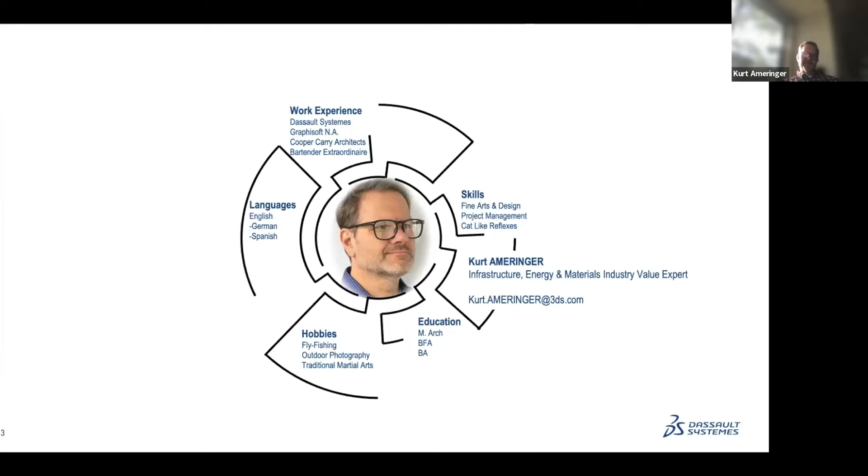So I guess going way back, when I was 8 years old, my grandfather, a general contractor, took me out onto a job site, gave me a broom, handed me a dustpan, and you could say introduced me to the concept of eliminating waste in construction.

So, quite a number of years later, in I think it was 2000, after a number of years working in the architectural space, creating 3D models of buildings to be able to produce drawings and schedules and other pieces of that, I started my journey to really change the way that we think of, as an industry, design and construction, and really wanted to push this idea of moving from working in 2D and to help people start to understand the value of what was eventually branded as BIM. And so that was where I kind of wet my feet on the technology side. Geez, 22 years ago now.

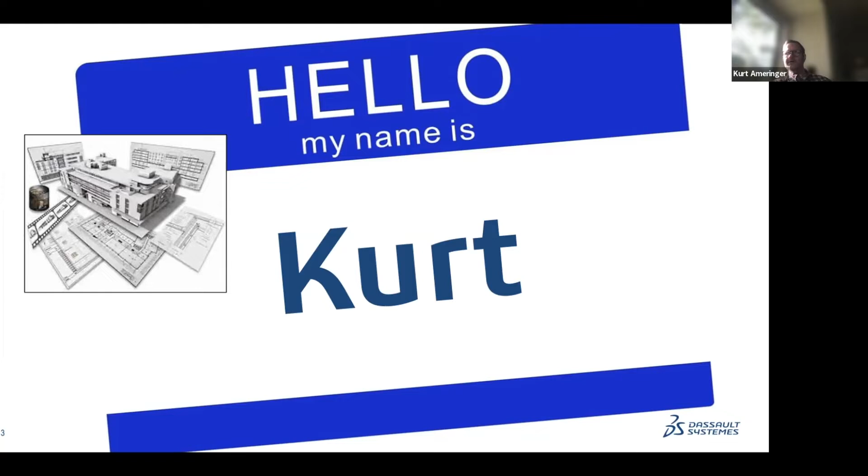And about 3 or 4 years into that journey, I started then looking at how BIM could be leveraged into construction, and started working with some of the general contractors in the Bay Area to develop workflows and solutions that populated eventually what was branded as VDC.

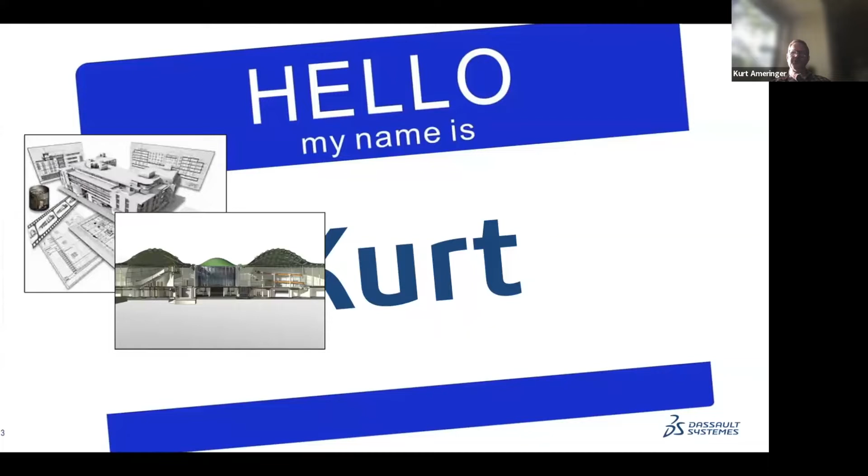So after 10 years within that space, I made a lateral. I started looking around at other kinds of activities that were happening in the world. And I moved from focusing on best practices in construction and really wanted to start learning about best practices for manufacturing and experience this idea of PLM, product lifecycle management, and where that could help inform a lot of our decisions.

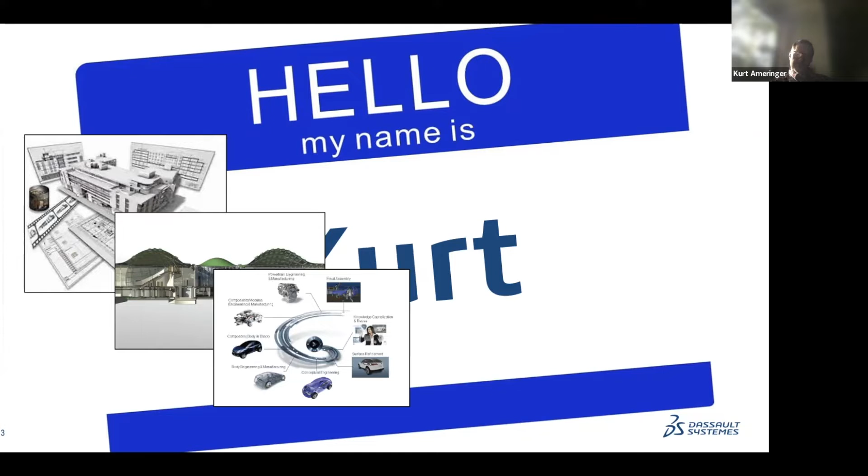By this point, BIM and VDC had a pretty good hold in the space. They were doing what they do, and I was looking to take that a step further. And so that was 10 years ago where I started that leap. And that actually led to where I am today with Dassault Systèmes, which is leveraging this now 20 years of experience as a technologist to investigate how we can improve, again, how we collaborate, how we work, and really in the recent years, looking at this concept of experience.

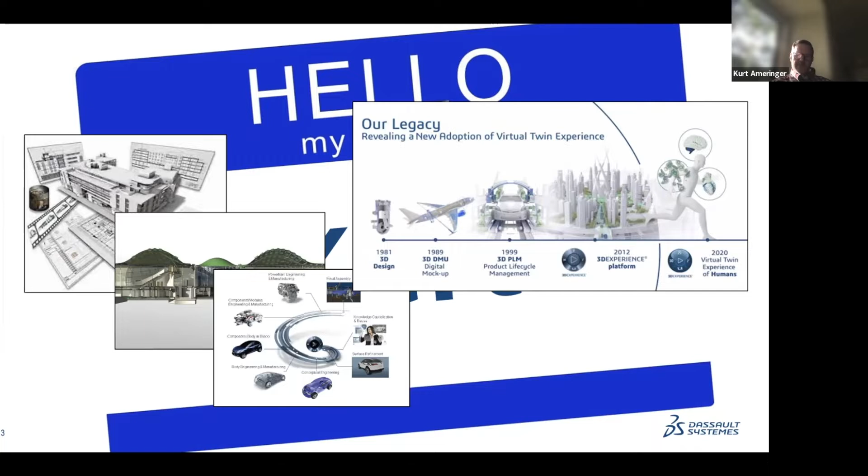So all that being said, I guess to get started, I want to take a look at this with the end in mind. So start at the beginning, look forward to where we want to go. And this is the virtual city of Rennes. Rennes is one of a number of cities that's been virtually built with a digital model of the entire city. If you're not familiar, Rennes is the capital of the Brittany region, and it's the second fastest growing metropolitan area in France. Estimated population somewhere just under 500,000.

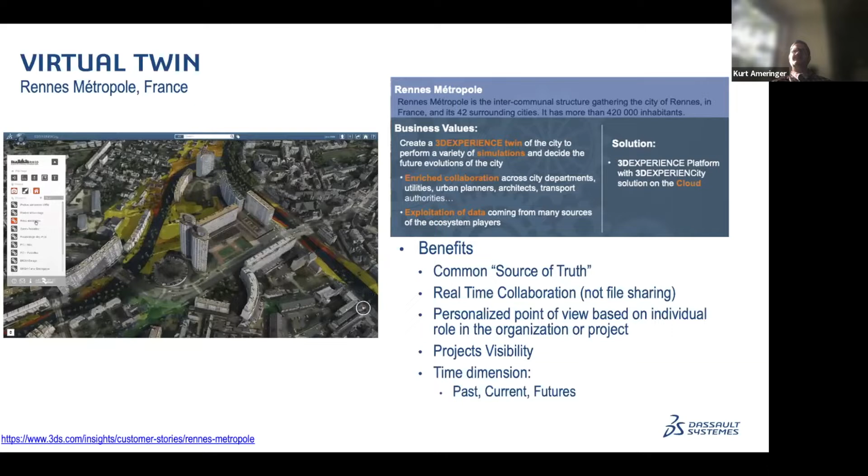And this data set that we're looking at, Virtual Rennes, has been created by combining different data sources in a single unified referential. It's constantly updated as new information comes available, so it's really becoming its own living and breathing entity that combines the buildings, the site, the GIS data, really everything out there that's available. So it becomes an accurate and reliable virtual equivalent of the real city.

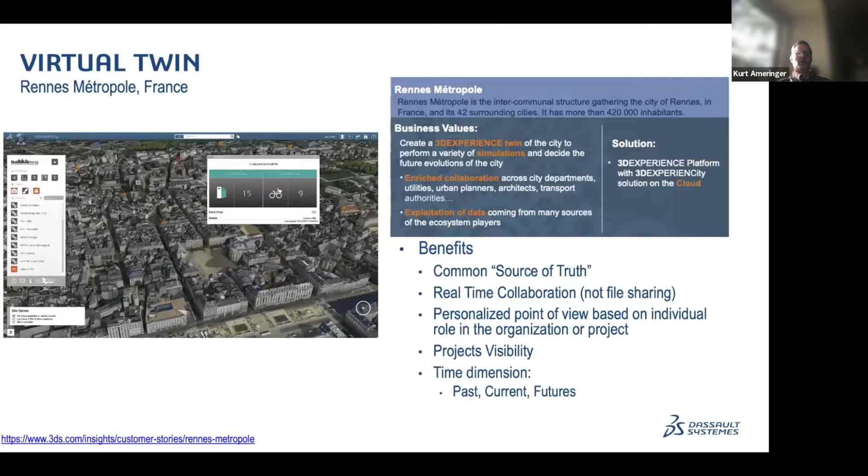And it's something that officials within the city, the residents, businesses, developers, utilities and service providers, anybody within that space can look at, can simulate, can virtually experience and visualize this city with a holistic view of how it may evolve. Even in some cases, collaborating on sustainable solutions for the urban environment here, where we're looking at, for example, how somebody might move through the city on a bike and looking at traffic patterns and impact, all of that's been laid on top of this.

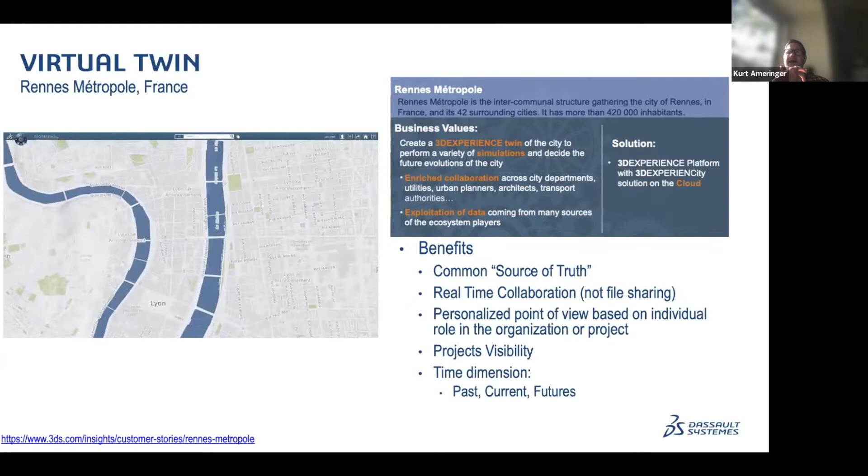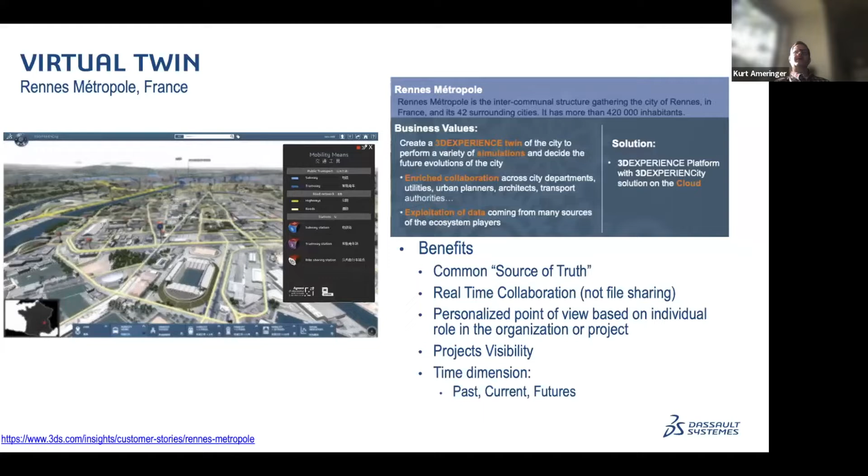And so we're also doing a similar thing over with Lyon. And again, I mentioned there are a number of cities around the globe where this is being engaged, but I want to be clear, this is not just a collection of massing models. It's not a bunch of files that have been referenced together as a pretty picture. This is really a fully detailed data set of the entire city, where literally every building, every system, in some cases, every tree has been populated in a single integrated virtual twin.

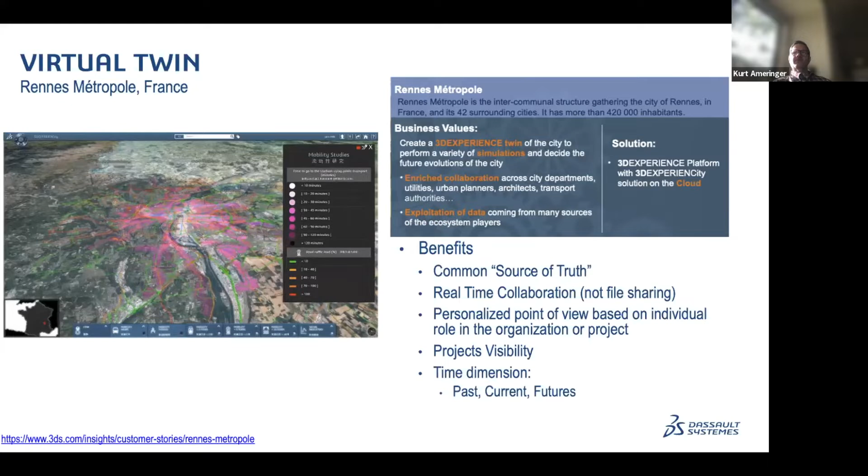So leveraging this information at scale for the development of the entire urban environment that's constantly evolving has become much more manageable than it would be otherwise. And so this makes coordinating the renewal and planning of buildings, utility networks, mobile systems, whatever infrastructure is there, less of a challenge. And it enables people to look at long-term planning and decision-making to be able to accommodate the needs of the residents both today and downstream into the future.

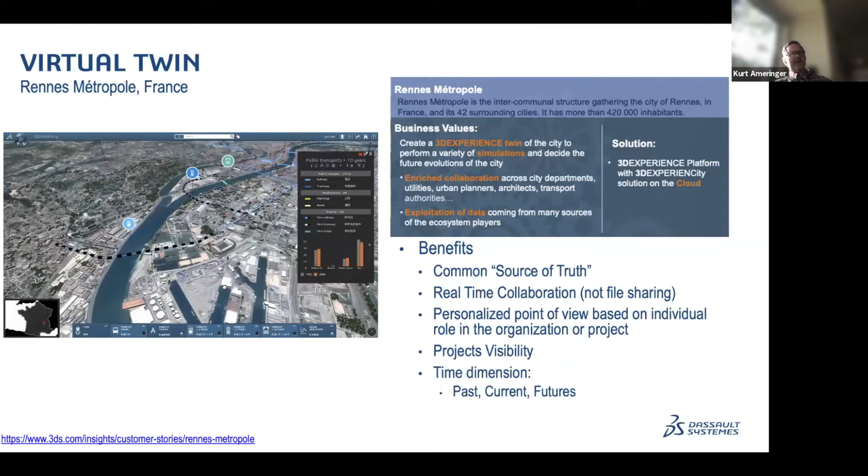So with this virtual twin defined at this level of information at this scale, key stakeholders are really able to engage in a collaborative effort to digitally drive a sustainable transformation of the city, with potential to be able to anticipate and really plan for a more livable, resilient urban area by leveraging and interpreting all of this data.

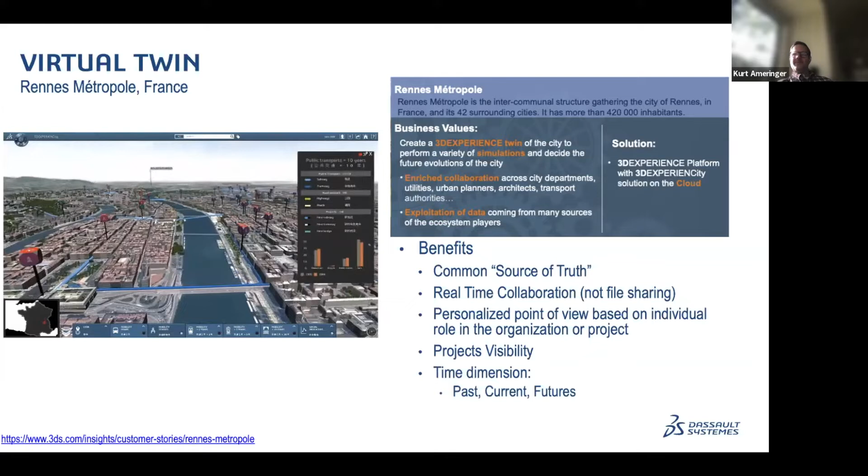So I think about where we stand with building information modeling today, and I see a world of potential in expanding that information from that single entity to that entire city, and being able to virtually build with this level of detail, that fabrication level of information, and the opportunity to leverage that data for moving beyond BIM really becomes exponential.

So I said twin. There are a lot of discussions about twin, virtual twins, digital twins. My grandfather was a twin, but what is it? And when I like to start off, I think about, again, this idea of capturing information. And a lot of us are doing that today within the cloud, within server systems, whatever it is, we're storing files. And this twin can store files. But it's not like a common data environment where we're just uploading project files to a cloud or some repository. It's where we're actually integrating this information and starting to make it actionable.

So to frame this a little bit differently, when I think about what I see as most of the digital twins that are available today, I see these as being purpose-built. Somebody builds a twin and a BIM, it's intended to produce drawings, or maybe it's intended to do structural analysis, or maybe we're starting off by capturing existing conditions, or we're building something to do construction simulation.

But from my experience, I found that a lot of these twins don't really cross the border between those different sections. In other words, one that's built to do models may not be built appropriately to do simulation. And the one for simulation isn't built properly to do sequencing. And so, how do we integrate this information? How do we do more than serve that initial purpose that was specifically built with this information?

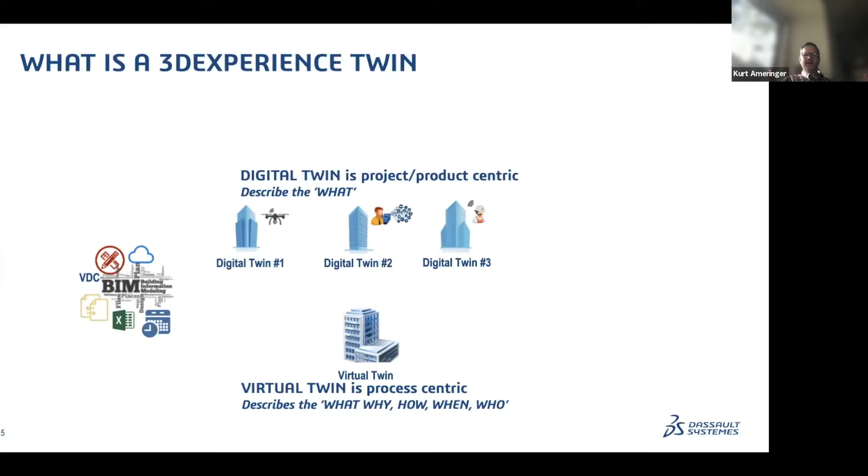This idea of a virtual twin starts to go beyond that. It captures and communicates this extended data in a standardized business semantic so that it can be used for more than that single purpose. So in other words, that virtual twin is capable of doing all of these different activities. And in fact, it can create these artifacts like BIM or drawings or whatever it is that we're looking at as a digital twin. But the virtual twin starts to live and breathe as this evolving reference that can grow as the city grows or as the project grows.

And then taking that one step forward, it starts to support a synchronization of business processes and our activities that provides this secure integrated point for all of the project information to come together to really be experienced, to allow this capitalization of business knowledge and process. And so as I look at it, this starts to become a business platform. It starts to connect all of the participants that are in our value chain.

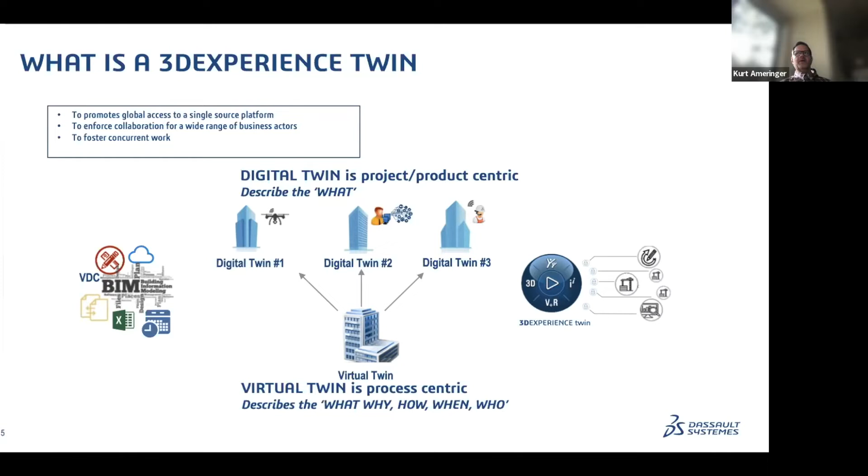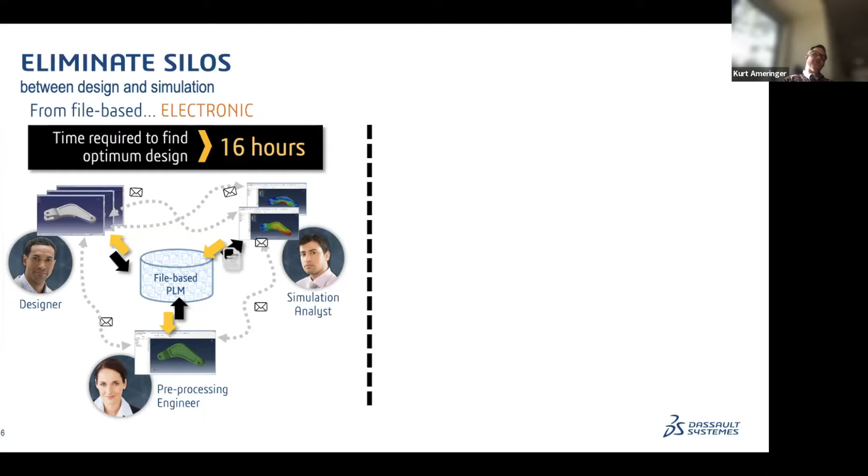And when we looked at this process and all of the data that was going back and forth, we started to realize that when the team was working in that unified environment on that single repository of information that was integrated, they were communicating together, they were designing in context together, they were making decisions together in that same model at the same time without stepping on each other's toes. The time to find solutions was dramatically decreased. In this example, going from, I think, 15, 16 hours down to 1 hour of running that simulation. And as we start to automate those things, we can even make that faster.

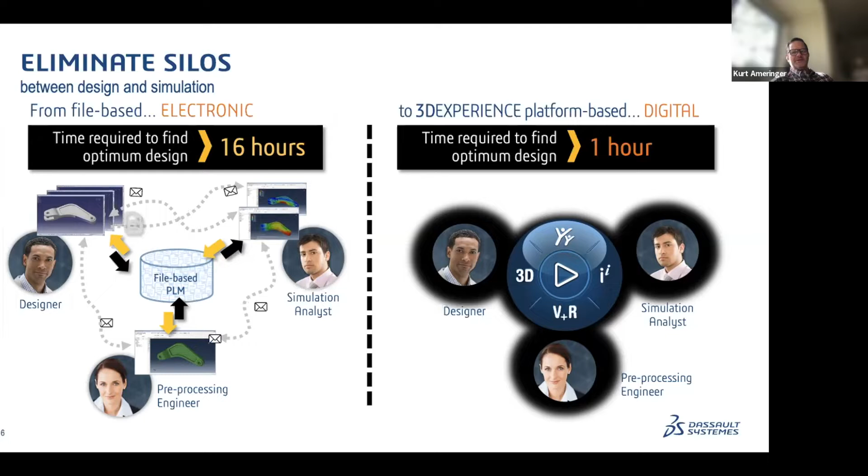But where this becomes, to me, interesting and exciting is not just in the time savings, it's again, that ability to communicate. So once we've run these simulations, all of that data is made available in a single unified environment where somebody even as senior as myself can get in and easily review all the options, all the decisions, who made the choices, what was the process that we went through to get to this point, and then make a much more well-informed decision about next steps, about how to move forward. In this example, we're looking at the environmental impact, the delivery schedule, the cost of what we're doing, who the trades are that are involved, all of this. And it's, again, put together into a very consumable environment to make sense of.

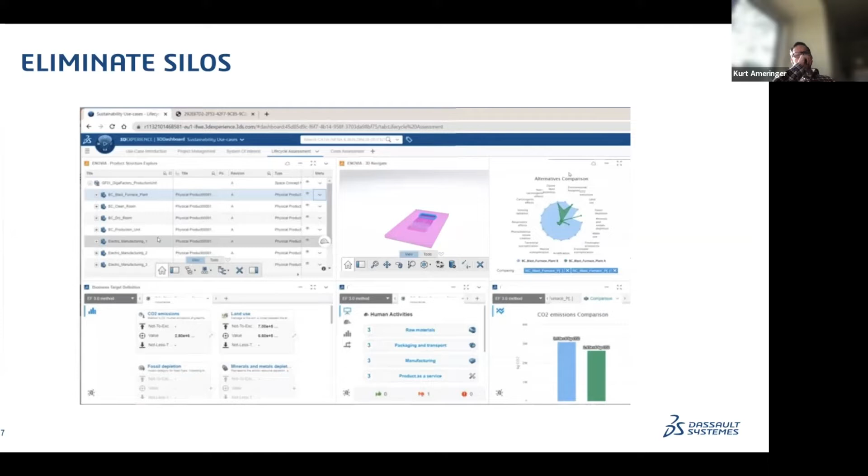And they're suggesting that 1 out of 5 RFIs go unanswered or potentially get lost. I've not hit that metric myself, and I think we could debate any of these points at length, but I would ask you to look into what's your process and how much time are you spending, how much money are you spending with all of these steps.

Just mapping this out, I think I counted somewhere around 11 or 13, so a dozen emails back and forth, multiple Word docs, Excel sheets, managing all these steps. And even if this is in a dedicated point solution that's built to manage RFIs, how much time are we spending, again, communicating with these artifacts and sharing this information, where we have to go back and say, which email did I get that had that information in it? Which version of that file was the most up to date? All of this gets tracked.

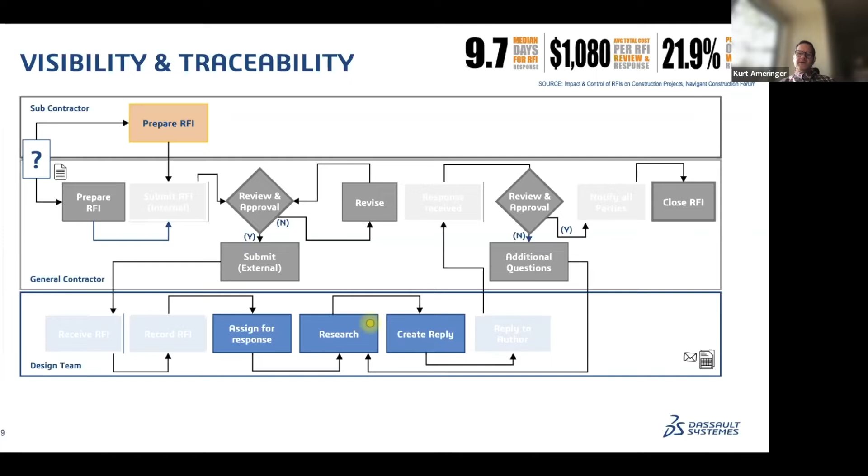And it starts to create this digital continuum of information that goes beyond just authoring, building a model, creating a schedule. It unifies this information to help us make better decisions. But it also then starts to become that platform that impacts literally all aspects of the project life cycle and our business. And I'm going to spend the next few moments here explaining how that business transformation has occurred in some of these other industries that we've referenced.

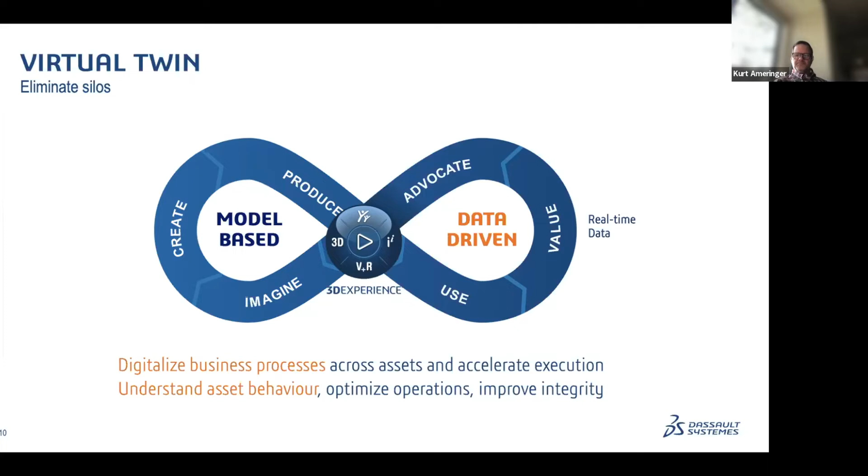So as a starting point, I'll start off with a short story about Boeing, possibly one of the gold standards, again, of process change. And I think Boeing started this journey back in 1989 when they created a DMU, a digital mock-up. That's a model with fabrication level of detail of everything for their 777. So all of the shell, the skin, but all of the components, all the fasteners, all of the systems, all of this was modeled internally

to create this DMU. So again, it's not the design intent, it's really being able to run a QTO on every single fastener that's in this model, and being able to then leverage that information across the life cycle of what they're doing. So now, nearly 30 years later, in 2017, Boeing and Dassault reached an agreement to develop a second 30-year partnership. And the focus of that partnership is really on designing the next generation of aerospace solutions to modernize the entire production system at Boeing and to enable Boeing to deploy new services. And as I mentioned, this is a partnership.

So this is becoming an end-to-end collaboration, digital collaboration, really, of design, engineering, simulation, analysis, manufacturing planning, even shop floor execution, to be able to reduce challenges in integration and improve costs, improve productivity, facilitate or foster new innovation, and to be able to aid in the introduction of best practice processes to deliver standardized work across the entire value chain. And that, again, starts to become interesting when we look at projects like the 787, where you may have had wings being built in different factories in different parts of the country, brought together and assembled in one centralized location without any hiccups or surprises or challenges along the way.

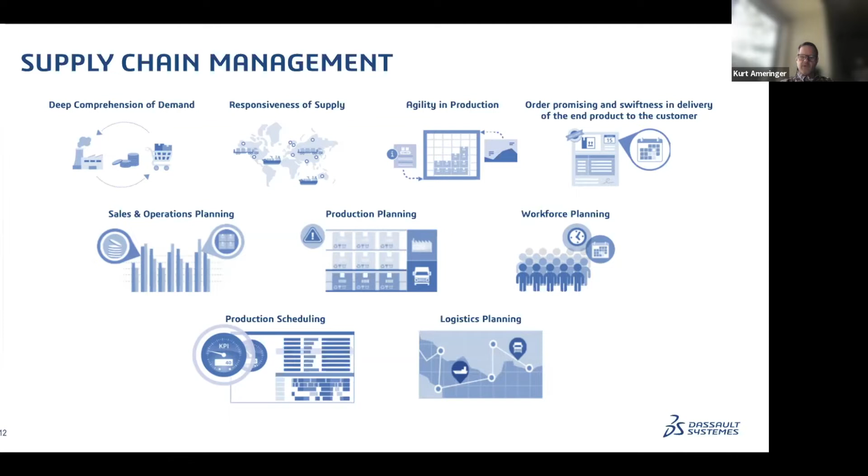So that being said, I think that if we can simply look at understanding what the demand is going to be, being responsive with the supply options we have, and then take the time to look at production planning, workforce planning, production scheduling, logistics planning, all of these things are having an impact in the way automotive and aerospace are coming together. And that level of communication and coordination is definitely something that we can learn from in the construction space. And so to that end,

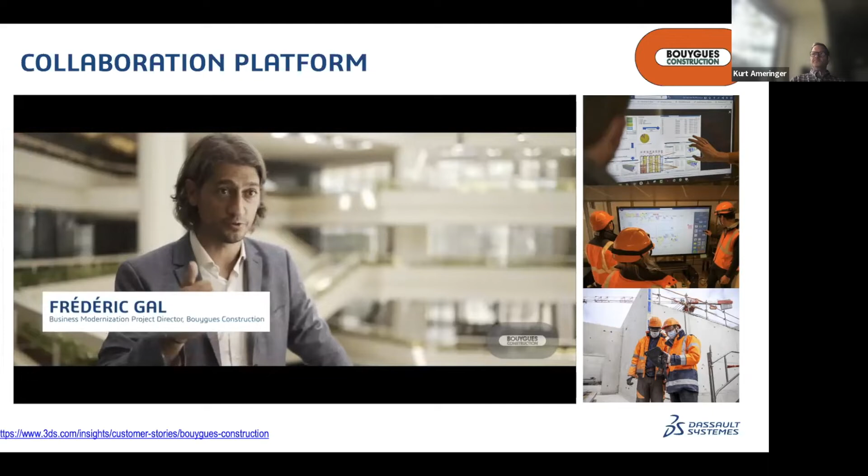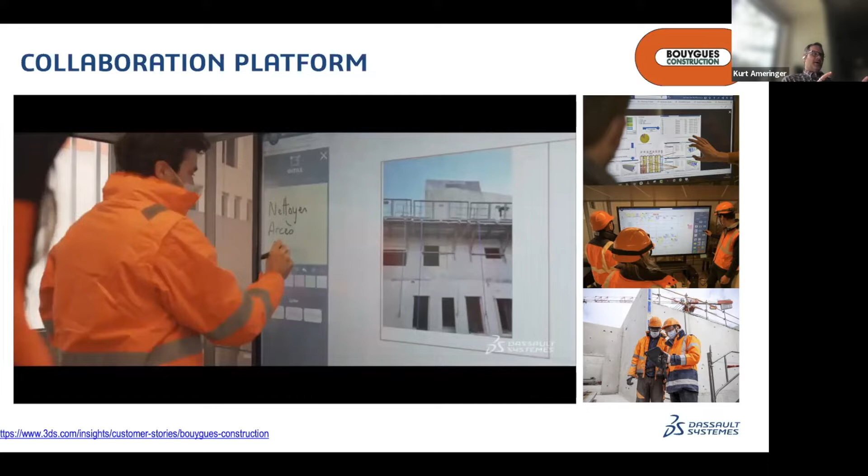I won't bore you with the audio on this. This is an example from Bouygues Construction. Bouygues partnered with Dassault with the ambition of building a next generation of solutions that will address the construction industry's key challenges and support this idea of customization at scale. I mentioned product a little while ago, different from project. You're going to hear that distinction pop up a little bit in the next few moments as we talk through this. So this was an initial pilot idea for Bouygues, and it was a critical point within their digital transformation strategy.

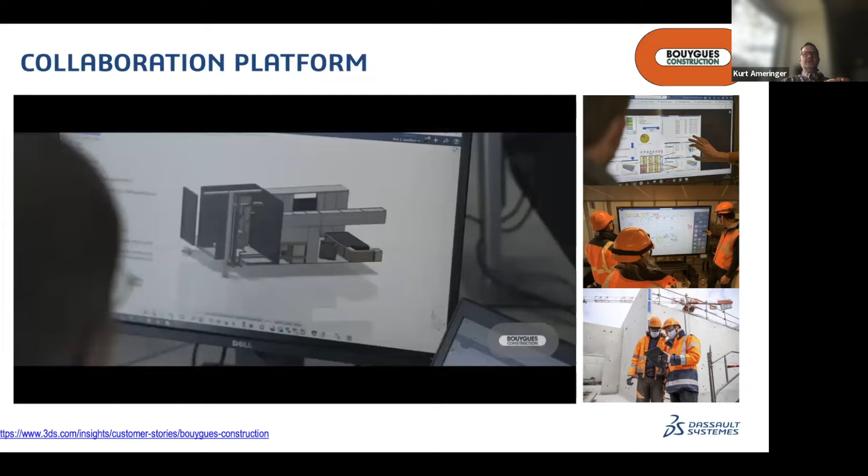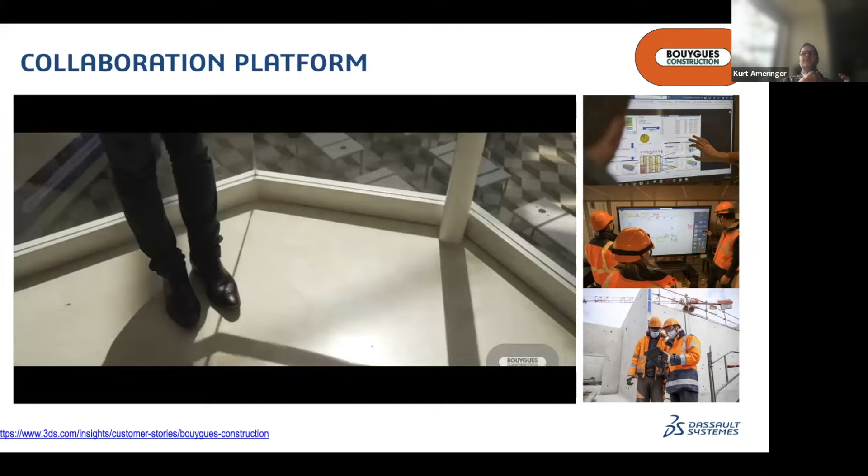So the company engaged to try to define new work methods and improve the way that all stakeholders on a project are collaborating across that value chain. And their end objective is to deliver tailor-made construction with industrial methods. So they're developing a digital project management platform on the cloud to become the collaborative solution for managing all the projects for all the stakeholders. And really, they're just looking to break down the silos in the ecosystem and develop this project-centric approach.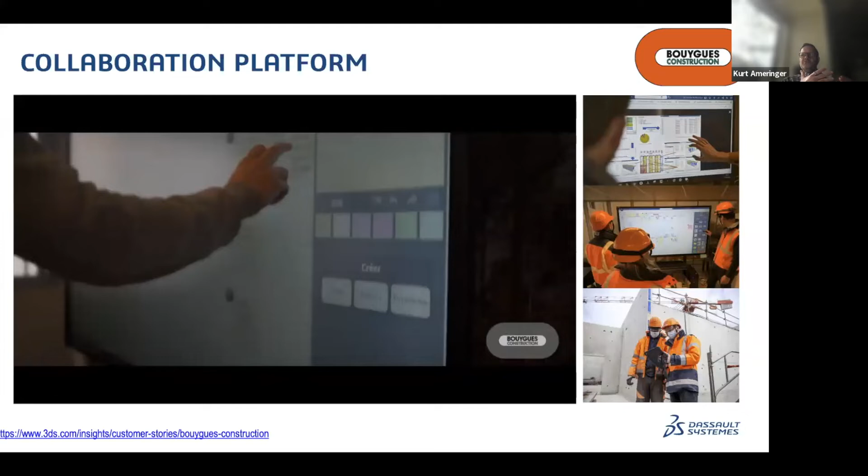So to ensure success, Bouygues and Dassault both work together within this value engagement framework. It's a consultative methodology used to design, to quantify, to create measurable business values and outcomes together, where both parties are bringing something to the table.

And then that common objective is then the transformation that we go through of that ecosystem or that piece that we're addressing. It really allows all of the stakeholders to benefit from this collaboration of the virtual twin. On the bottom of the screen, you do see a link from our website at 3ds.com where you can actually get more information about this project.

But the long and the short is that this partnership is playing an integral role in helping Bouygues to become green, to become more socially responsible, more environmentally responsible, and to be able to address their sustainability challenge, where they've made a commitment to reduce their carbon emissions by 40% by 2030.

So, again, they're looking to make significant impacts in the way that they calculate and optimize their carbon costs, by the way that they're managing material resources, by the way that they're really providing value to everybody within this project. And so this process, this streamlining of everything from design to fabrication to assembly, they're looking to be able to reduce waste on the sites and on the factory floor by having better analytics, better metrics, and better communication.

And so Bouygues is in process right now of their rollout, which is targeting, I believe, somewhere in the neighborhood of 15,000 users engaging, communicating across this platform.

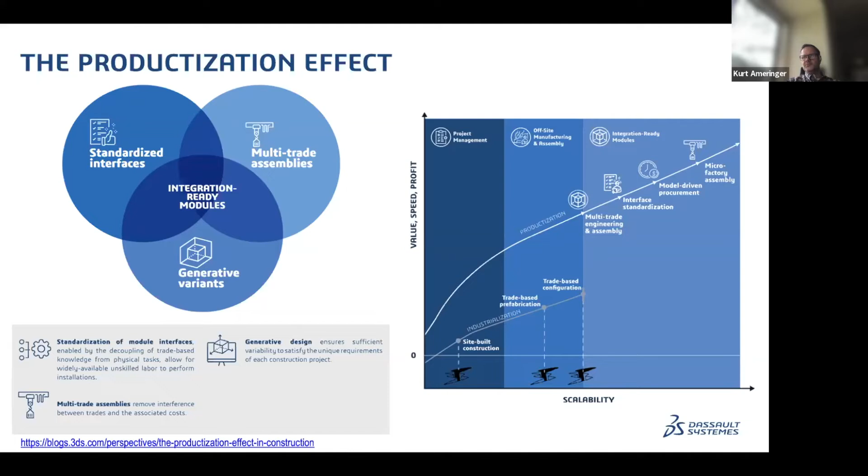And that's why I started off with the city at the beginning of all of this, because we want to say, where are we going with these pieces? And all of these pieces need to come together to form that whole. So as we're working with this, we're engaging the designers, the manufacturers, the fabricators, the operators, to make better decisions about those design choices early on. And it's really pushing, I think, all of the participants in this collaboration process in this construction space to rethink how they can best deliver value.

But what has been key to their approach is that they're looking at how the building is built is going to impact how it's designed. Okay, again, that's how we build airplanes, that's how we build cars. You don't figure this stuff out after you've designed it in other industries. And so their design process follows the impact of the manufacturing process, again, starting with the end in mind.

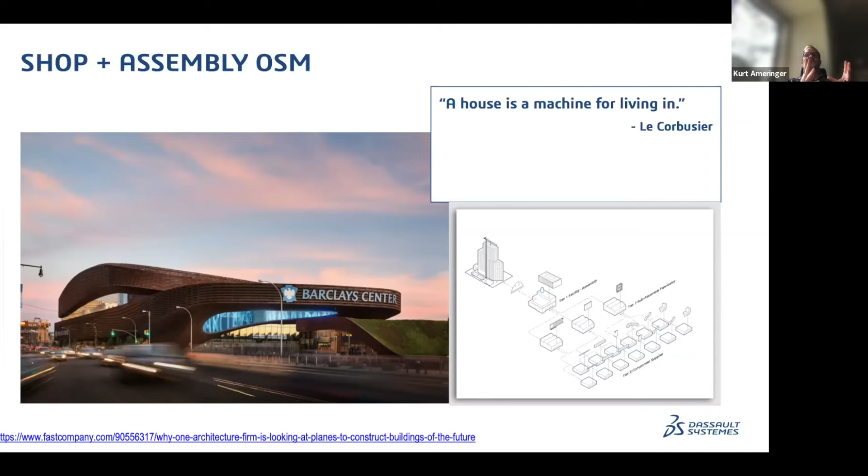So the assembly approach has been to decentralize this process with individual suppliers manufacturing components in various locations that are then put together, delivered to the site, and lifted into place to be able to develop a building in roughly half the time that it takes from a traditional construction process. And that's half the time of manufacturing the parts and assembling them, as opposed to bringing raw materials and building on site. And they're positioning that somewhere around 85 to 90% of a given project can be done in this capacity.

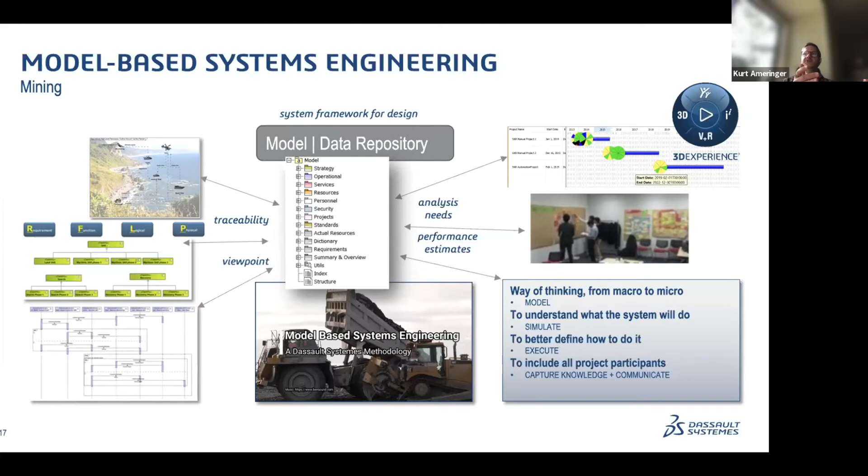If I had enough information, I could probably go for the next 2 hours just discussing this topic and would just be scratching the surface. But suffice to say, this is a process of limiting risk and improving predictable delivery by improving visibility and traceability of who's doing what, when, and why to the project requirements to ensure that they're met in the finished product or project. MBSE is most mature in aerospace, defense, rail, automotive, and industrial industries. And this is an example from mining.

So to take a little bit deeper look at this, again, just scratching the surface, this is an example where I'm looking at industrial equipment. As we look at this excavator, it's being defined not as geometry, but as a system of systems. So the requirements, what does it need to do? The function, how does it do it? The logical relationships, how these pieces come together, and the physical objects, how big is it, etc., have all been mapped in this MBSE approach, along with the system controls and even down to the software necessary to drive that excavator.

So on the right, you can see all of the elements coming together to design the product, but as well, they're looking at how it's going to be assembled. Think about means and methods. How is it going to be delivered? Think about logistics. All of this is being simulated prior to finishing the design, even down to looking at a worker servicing the object or assembling the components. So what are the ergonomics? What level of detail are we working with?

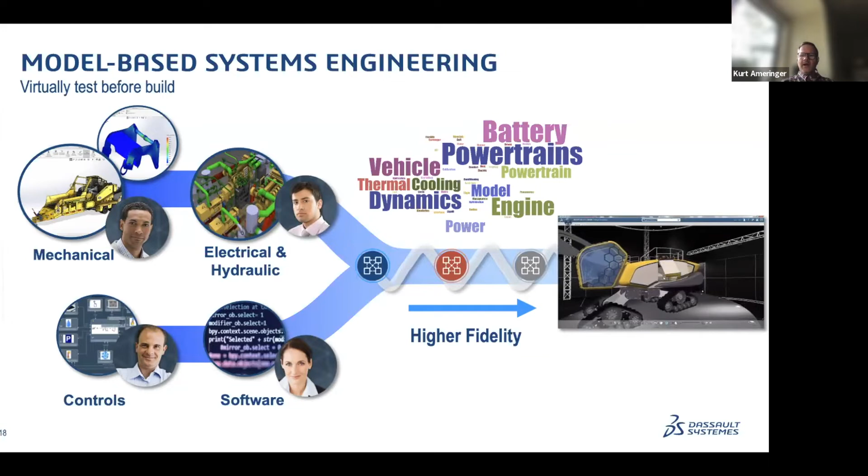And as we have this information, we can start working together, looking at what-if scenarios, looking at how we solve problems. In this example, we can see the impact of putting in a different controller, swapping out some of the hydraulic components, changing the dimensions of an element, and then the actual real-world impact of those changes to that system. If we change the hydraulics, what is the impact? Is this going to work as we expected?

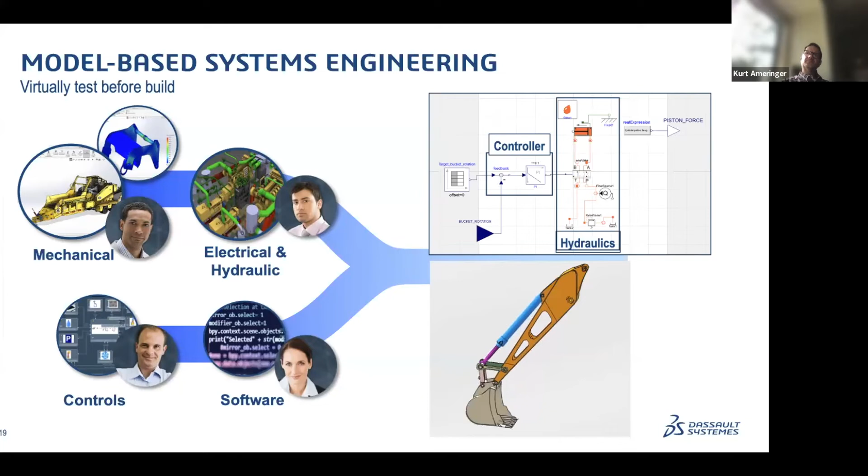So the simulation is not just looking at the visibility of an object on a site. It showed up, it fits, great. It's investigating how the element performs in realistic conditions and what additional parts of the project might be impacted by the change. If we change that hydraulic component, what's the impact on the length of the armature? Will we be able to move that bucket the full rotation that we expected? And so this is combining engineering, simulation, and visualization.

Chances are the last car commercial that you saw was at least partially computer generated. And they're doing that to be able to speed sales, so that they're filming, creating these commercials before that car comes off the production line. So, we're seeing the new electric truck. It doesn't actually exist yet, but the commercial's there and we can pre-buy it.

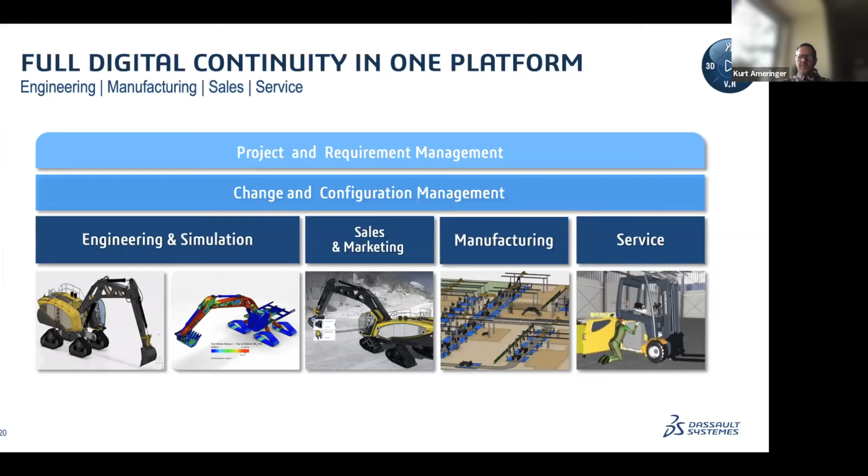This is part of that integration, and even down to optimizing manufacturing and now lifecycle maintenance and operations. Again, that end in mind, what are we doing on the service side to continue this information, do more with it? So another example in the rail space is where the train, the controller, the signals, the switches, in some cases, even the power systems are all being designed and tested virtually, working together as a system of systems.

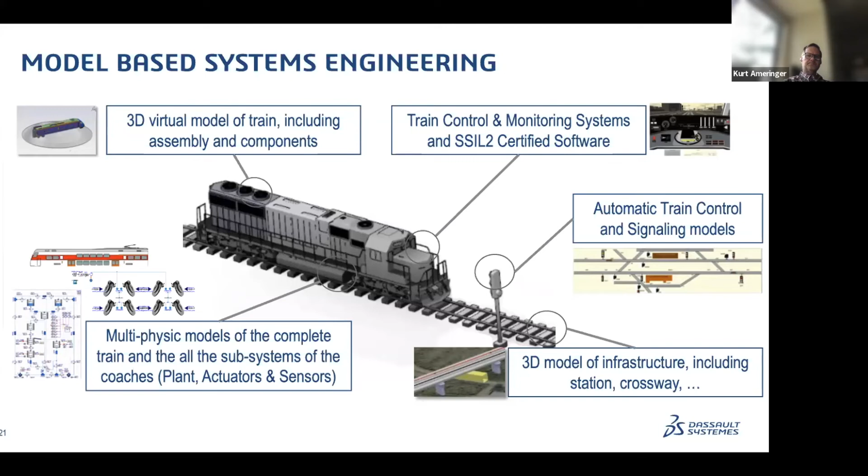So again, they're able to look and say, if we change X, the size of the engine, what's the impact to all of these other systems? If we change the size of the HVAC unit, what's the impact to everything else that we're working with? All of that becomes integrated. And by doing this, this team can ensure, again, virtually zero defect products through digital integration of the components.

We have people on site today that historically have done physical mock-ups, or they've done dry fitting of components at scale to verify that we can build this thing as we expected. We then take it apart, ship it out to site, reassemble it. All of that today is being done virtually. We're scanning the actual physical object and seeing how the pieces come together.

So this is driving a cost savings, system optimization through both the virtual and hybrid virtual-real evaluations while planning for operations by computing costs associated to assemblies aging. They're also, again, looking at that long-term impact of, if we design it this way, what's the impact going to be for maintaining this element? So they're able to shorten the verification and validation phase thanks to this simulation.

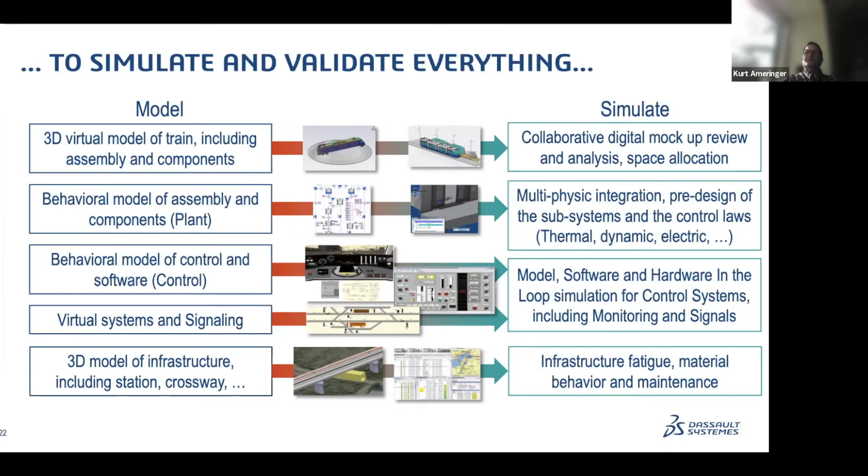And this is where in aerospace, this is required as a means of, again, mitigating risk, but having that real validation that things were inspected, tested, approved prior to construction. So all that being said, I'm coming down to the end of the presentation here, so I appreciate everybody's patience with me, but this is just a simplified kind of idea of this model-based systems engineering.

If you think about this from the standpoint of capturing the DNA of one of these products, this is a hospital example, and each one of those little modules is some aspect of a hospital room. It could be a patient room, it could be an operating room, could be part of the cafeteria, but all of these have been defined. And as we're placing them on the site, as we're automating this, and you've probably seen something like this in your generative design tools that you may be using, what we're getting is real-time feedback.

So this is telling me how many of these units we have. It's providing answers. Is the furthest patient room from the operating space, if that is important to me? All of this is being tracked and traced. And again, as we start twisting and turning and pushing and pulling all the model components, everything updates like you would expect. So nothing really new within that space.

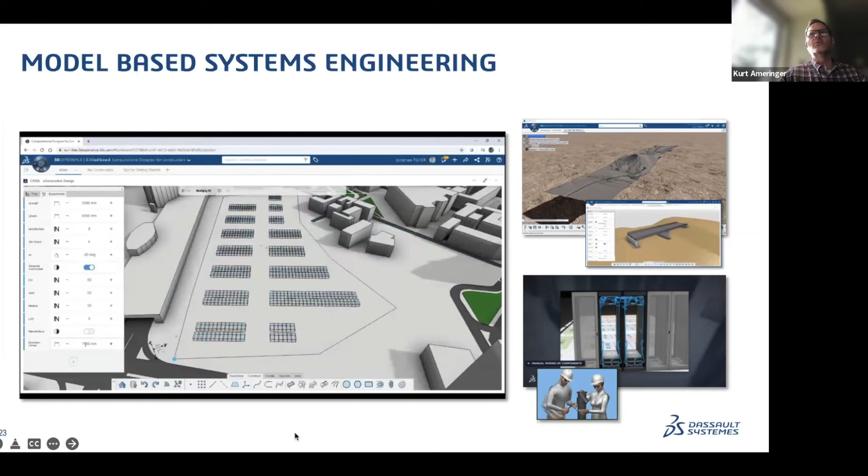But what I think starts to really become interesting in this, and I'm just going to step ahead, is every one of these little Jello cubes that we're looking at is an actual module. And when we find a design that we like, a layout pattern, conceptual work that we want, we can simply change the level of detail that we're working with. And rather than working with these as those Jello cubes, we're taking this down to selecting components and actually locating all of the finished product. Okay, and so we replace that cube with a finished module.

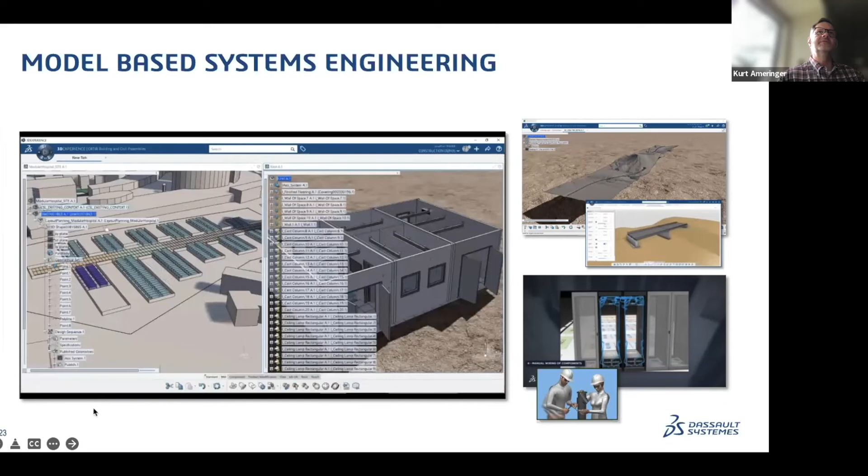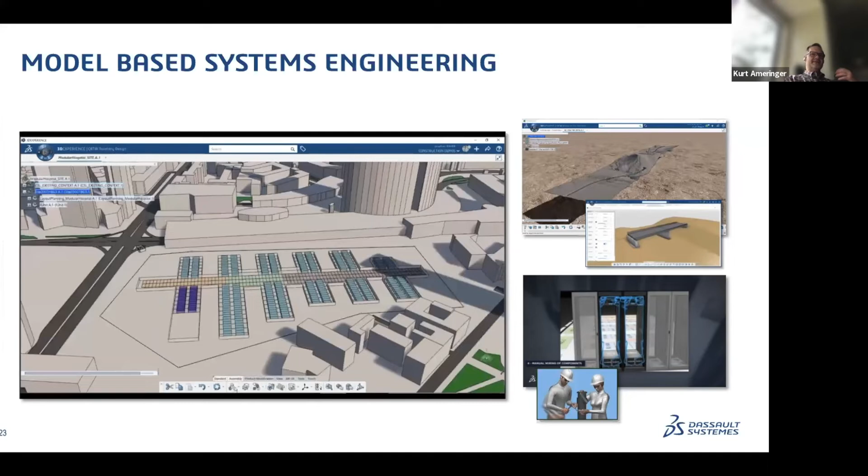But again, I want to be clear, this is not just swapping out a block in our tool. It's not changing the family that we're working with. This is actually changing that level of detail to incorporate all of this information. And so as we look at this individual unit, I can select one of these Jello cubes and drop that unit in its place. And now I can see how that module would act and react within that area. And that starts to become important, obviously, because I want to know what's happening with that.

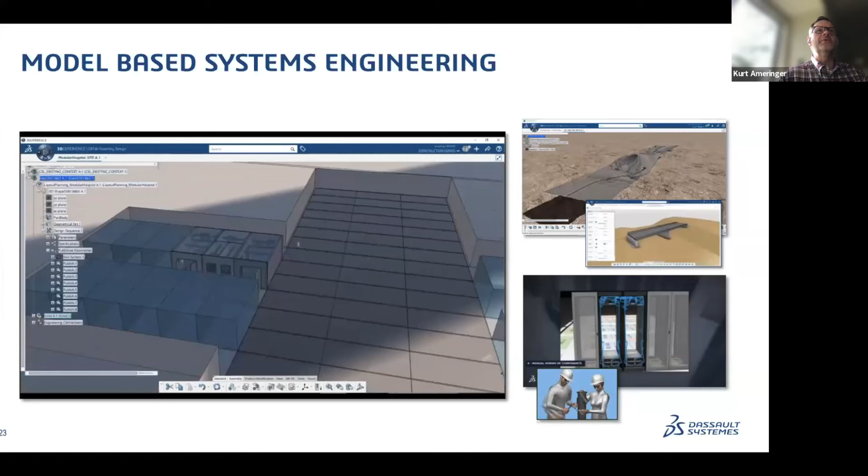But rather than just mirroring, arraying, copying this component, what we're actually doing is, as we've placed that one instance, we start then to replace all of them. So all of the individual components. And I'm just going to jump ahead here a moment.

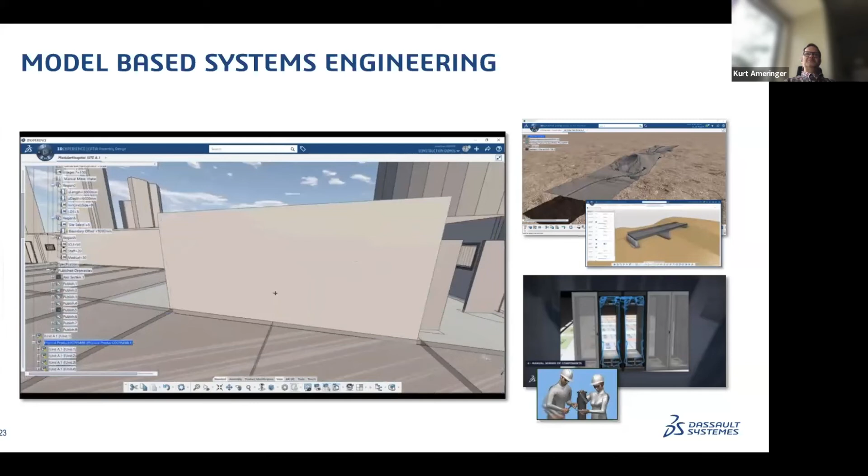And so now we've swapped out every single Jello cube with the actual fabrication level of information. So we have the hangers, we have the HVAC, we have the actual patient rooms laid out, even down to the IV bags. All of this detail is now automated within my model. And so if I want to know how many yards of hose line I have for those hanging bags, we can calculate that information.

But more importantly, we can say how many beds do we have, what's the actual number of connectors, et cetera. And as we continue to develop that, each one of these individual units is smart enough to understand that because it has a relationship to everything around it, it's not just putting a wall on top of a wall, which is going to goof our constraints, right? It's starting to figure out, well, if these two pieces are coming together, we only need one wall.

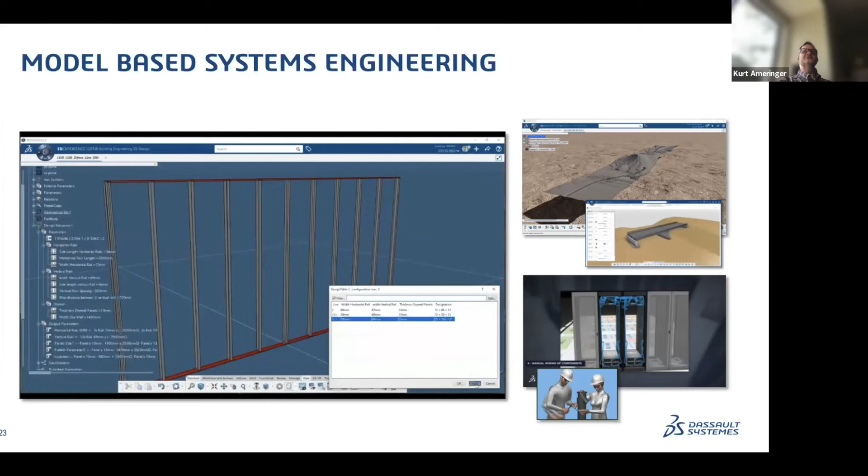And as such, how do we frame that wall? And what are the elements driving the framing on either side? Do we need blocking to support these? All of these questions are automated and part of that DNA. So we're modeling all of the components to ensure an accurate bill of material, or QTO.

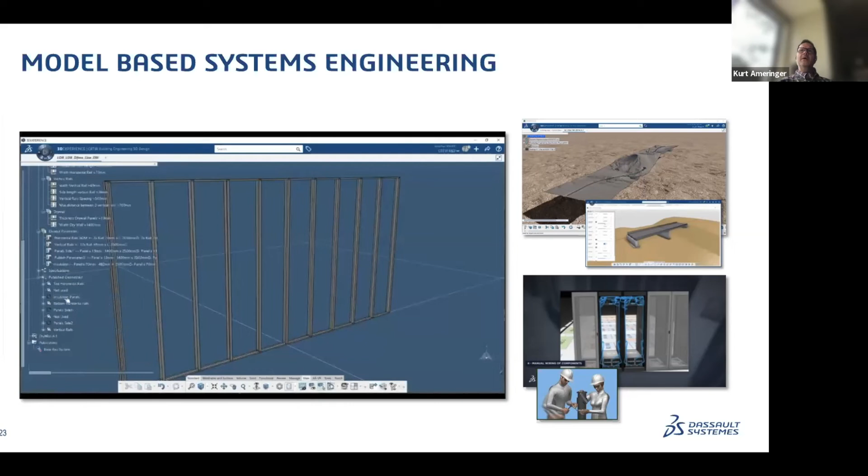And because we have all of that information, we're then able to do accurate analysis, accurate simulation, and even, if we look on the right side of the screen here, we're doing this at the level of scale. So 40 plus kilometers of rail, every single component being modeled. Looking at data centers, even down to the cables connecting the different components, and work instruction, how are those going to be assembled? Validating ergonomics, do we need ADA compliance to be able to get in and safely execute these activities? All of these are additional opportunities to leverage that model to do more than just what we're doing today.

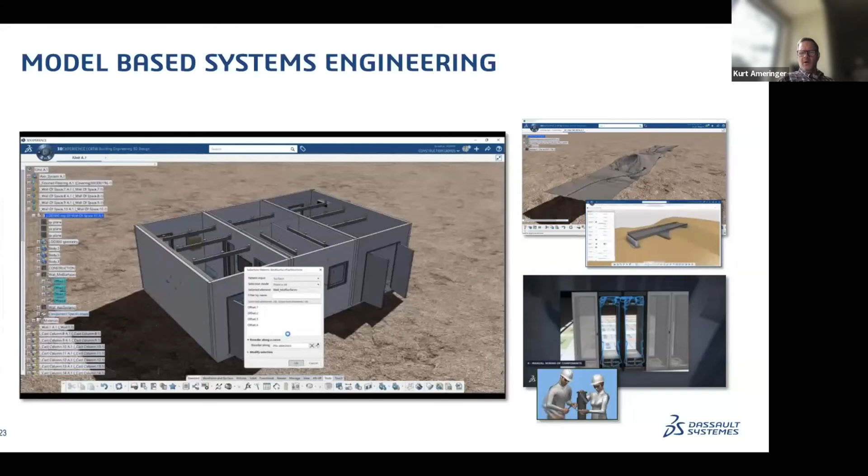So that being said, I see my buzzers going off here. I think I'm starting to cross the line of my time allotted.

So I do want to just jump forward and say, because I feel like I've hardly scratched the surface on some of these topics, as we're talking about this virtual twin, if it wasn't already clear, design, communication, fabrication, simulation, collaboration, all of these are core benefits of this approach to a virtual twin. And as I look at the opportunity to expand that, there are probably years of improvement that we could execute right now.

But what's becoming interesting to my investigation in this is that every other industry that I'm working with is looking at extending the use of this data into operations and lifecycle optimization, and that is their end game. So when I go all the way back to, well, may seem like it was 2 or 3 hours ago to you, starting with the end in mind, I want to point out that we want to think about that end in mind and how do we get there. Let's use that to inform the design that we're choosing. Let's use that to inform our means and methods.

And so I just want to say, if I'm invited back, I want to take a look at how this is going to be executed in other industries around the world, how aerospace is preventing unplanned downtime, how industrial equipment is reducing their time to repair, how energy and infrastructure are streamlining collaboration, and really how so many other industries are capitalizing on this knowledge capture and best practice.